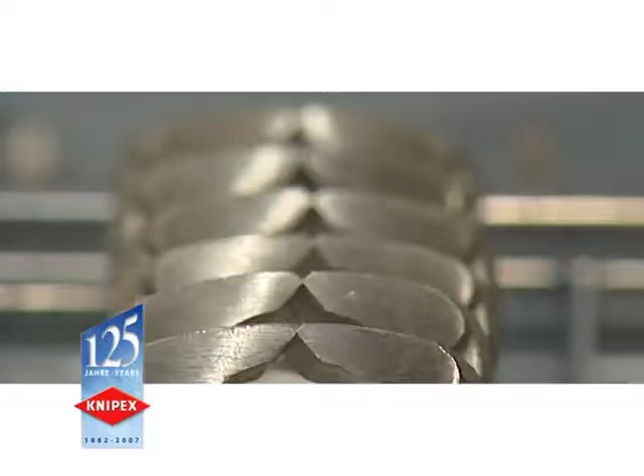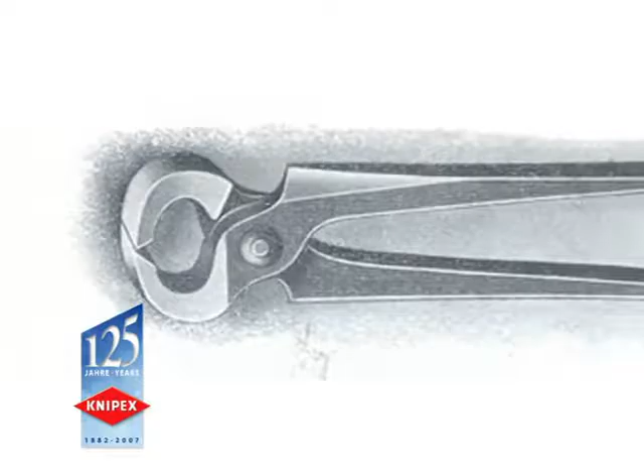It all starts in 1882 at Wuppertal Cronenberg. Carl Gustav Putsch sets up a small forge in which he, an experienced craftsman, and 2 apprentices manufacture pincers for carpenters and farriers. In the beginning, the small enterprise produces 60 pliers per day, all handmade.

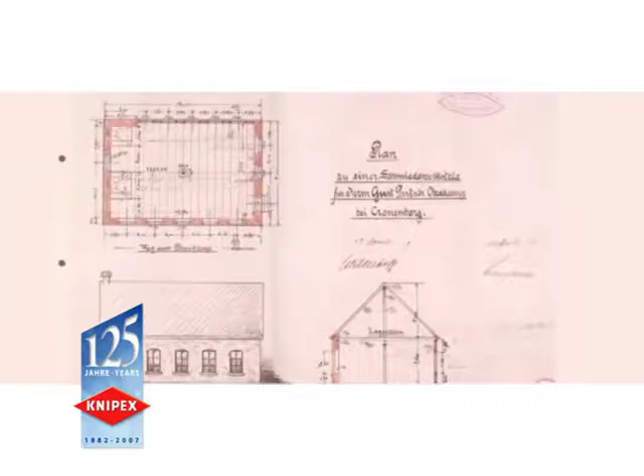At that time, there are more than 100 producers of pliers in the Bergisches Land region, the center of German tool manufacturing. Carl Gustav Putsch and his son Carl, who took over the company in 1922, are one of the successful manufacturers. They invest and expand. The first forging hammers and modern grinding machines are purchased. The material and finish of the pliers are continuously improved.

By 1927, 27 employees are producing 1,000 pliers a day. The small workshop has grown into a factory. The pliers are mainly sold through exporters and wholesalers.

Carl Putsch recognizes how important it is to give his excellent products a proper name. First, he uses the symbol CGP for Carl Gustav Putsch. Then, in 1942, he gets the brand name Knipex registered.

After the difficult years during the war, the company resumes work without having suffered any great damage. The product range is gradually expanded. Key products such as combination pliers, diagonal cutters, and water pump pliers are added to the Knipex product line.

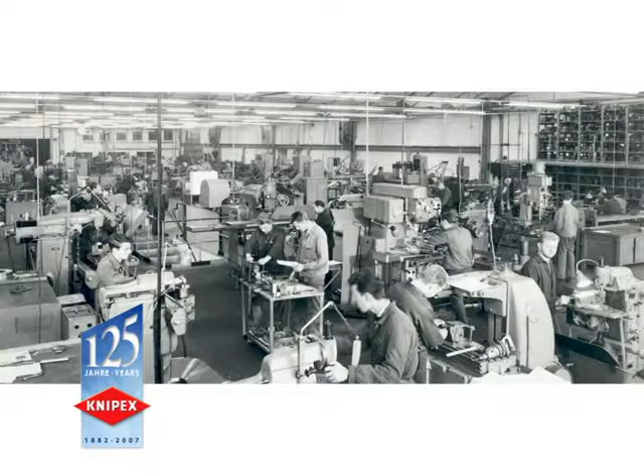In 1957, Carl Putsch Jr. takes over the management of the company from his father, who died at an early age. Knipex then has 250 employees. As a graduate engineer, he vigorously uses modern technologies to improve production and make it more cost-efficient. He is well aware of the importance of a good price-quality ratio.

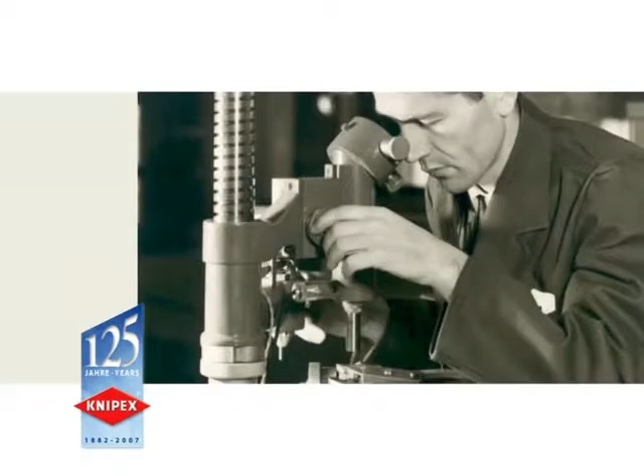Product innovations are also becoming more and more important. The newly designed pliers are of superior quality and set new standards in the industry. Carl Putsch's wife Ilse merits a large share of the success. She is largely active in sales and enjoys great respect in the industry.

A large number of countries are now supplied directly, and the Knipex network of representatives is growing. Knipex first becomes the leading manufacturer of pliers in Germany and then in Europe.

1987. The company then employs a workforce of 500, and Ralf Putsch joins the company. Ralf then assumes sole responsibility for the company in 1996. The up-and-coming generation continues to build on the solid foundations that built Knipex.

The distribution system is further extended, and Knipex marketing is reinforced. The first sales offices are founded and staff engaged abroad. Several manufacturers join the Knipex group. With their help, Knipex strengthens its position in certain product and market segments.

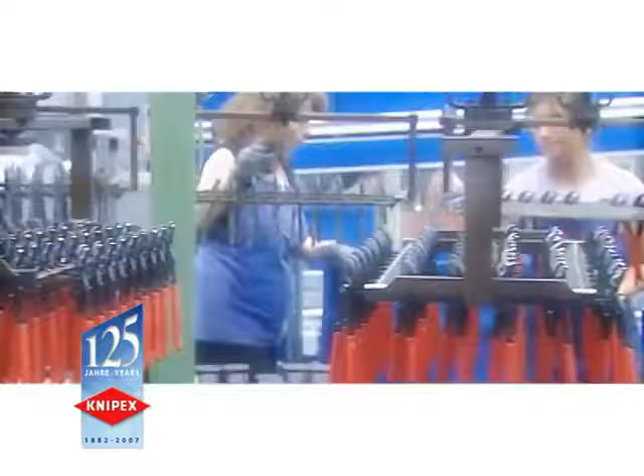Today, Knipex is the world's leading brand of pliers. More than 800 employees at Cronenberg produce over 45,000 pliers a day. To offer the best tool for every application, the product range now consists of over 1,000 pliers.

The continuous improvement of the range requires creative minds. How can hand force be reduced when cutting and gripping? How can work be done faster? How can the load and life cycle of pliers be raised? With what material and design? How do we improve ergonomics and safety? Again and again, our fresh ideas create a competitive advantage.

Modern software and systems engineering turn our ideas to the stage needed for production.

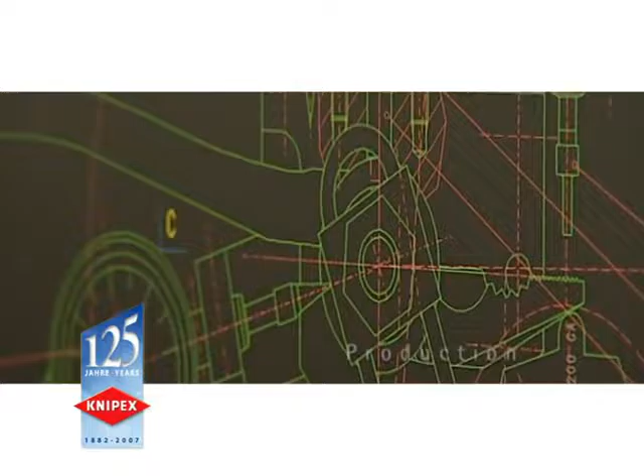We place high demands on our production. It is important that we directly control all conditions and processes. The high-quality steel is produced to our own specifications. The forging dies are milled internally on the basis of design data.

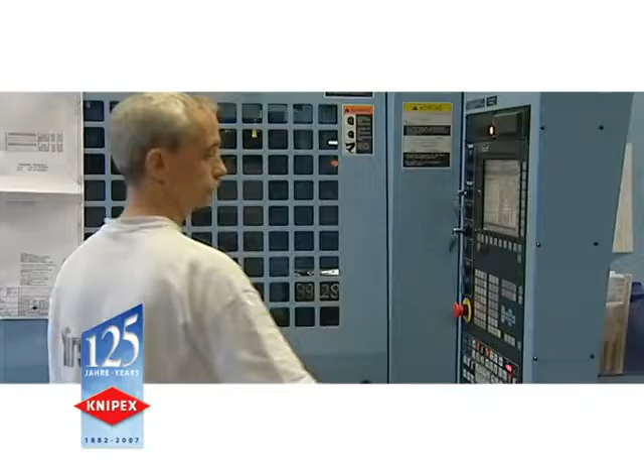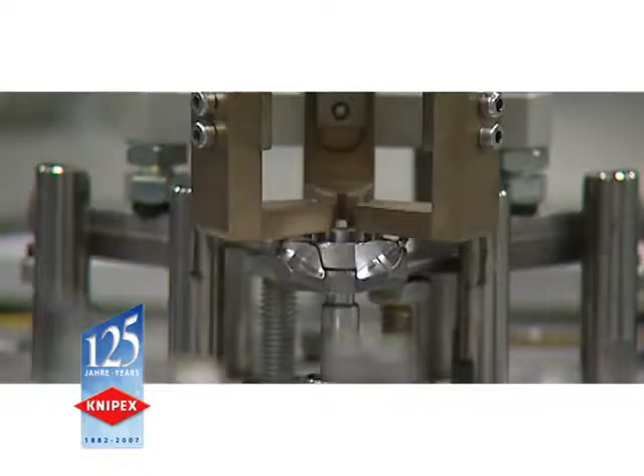The foundation for quality is laid during forging, just as it was 125 years ago. Modern production machines carry out the subsequent machining and assembly operations. We influence material properties by means of modern controlled heat treatment and thus achieve the best relationship between tool hardness and toughness.

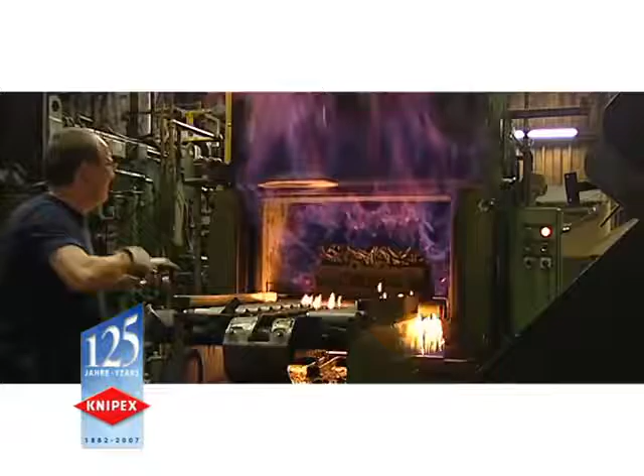The efficient production of pliers meeting the highest demands requires both modern technology and an experienced, well-trained workforce. These create precision and reliability. We accept nothing less.

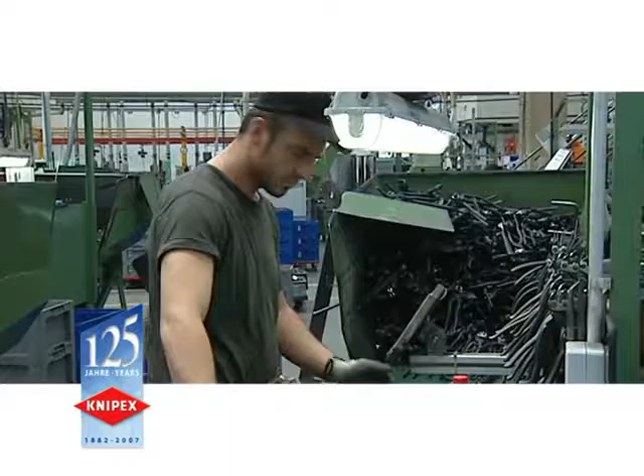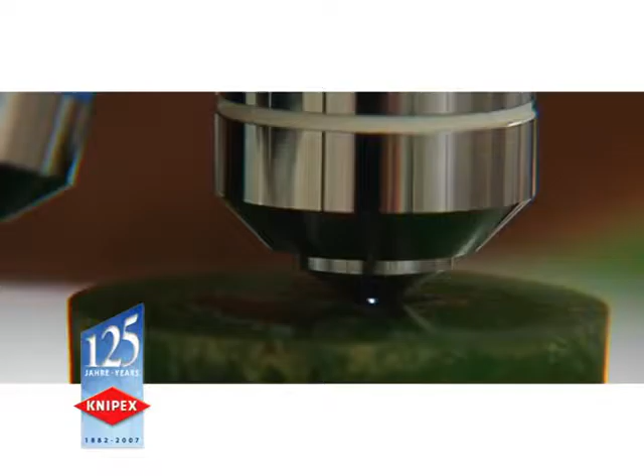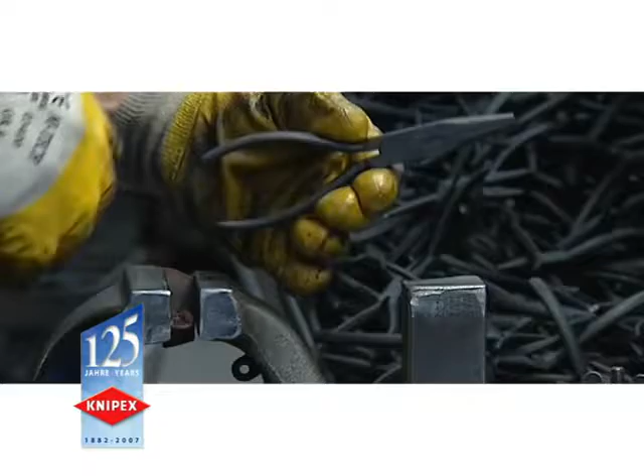100% reliability. This is what our customers expect. For this reason, each pair of pliers is checked as to faultless operation before leaving our factory.

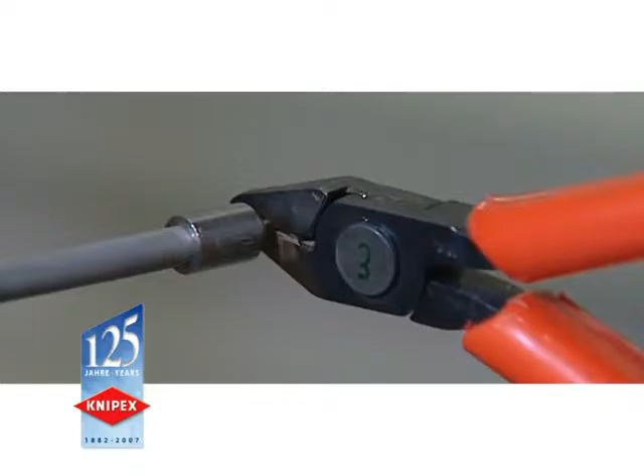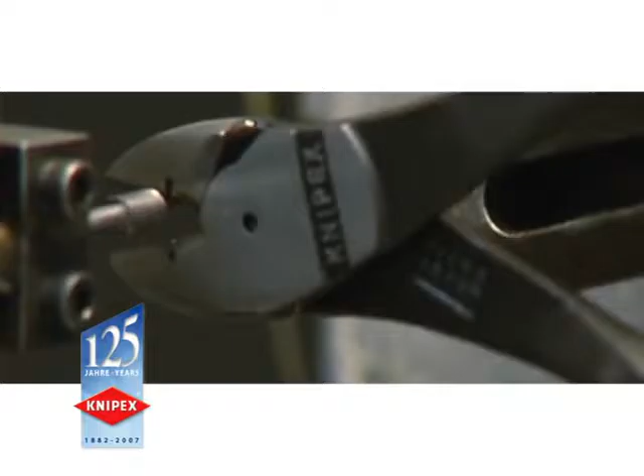We test new models and materials very extensively in our laboratory. Only those that passed the rigorous Knipex test procedures are released for manufacturing. Our endurance test shows just how great our lead is over our competitors.

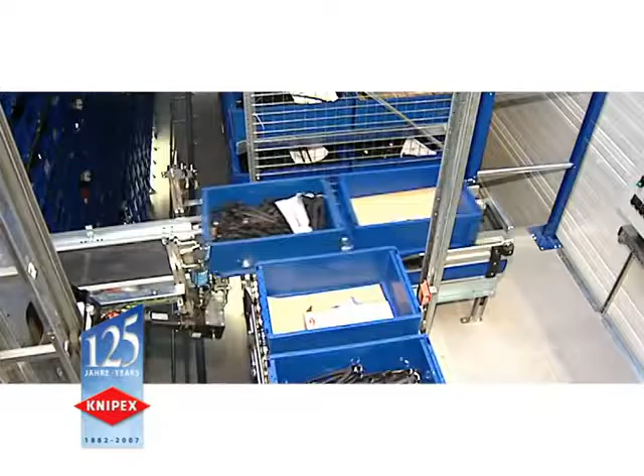Tens of thousands of pliers a day require a well-tuned logistics system, particularly in view of the high number of variations. Ultra-modern material flow techniques make sure that each pair of pliers reaches the right place in the warehouse or shipping department.

From here, the pliers are sent to all continents. We are present in 100 countries of the world thanks to our importers, representatives and branches. Although each market is different, there is always a path ahead. The key to success lies in close, effective cooperation with our partners. Our export share today is 65%.

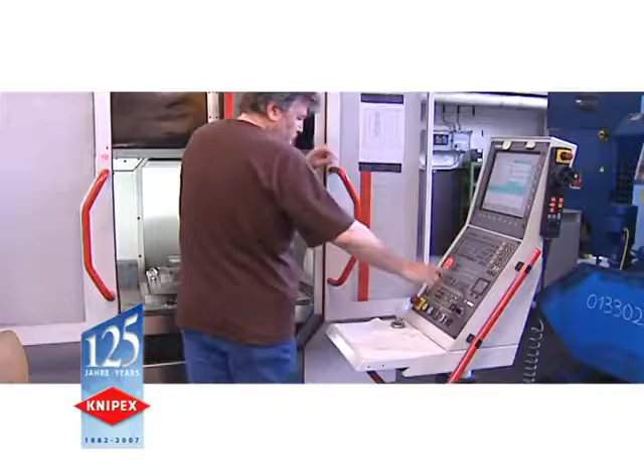We fully realize that our workforce represents our most important asset. Our employees have the knowledge and ability without which we would be unable to maintain our competitive edge. Only by above-average performances in all sectors and at all levels can we be successful in the future. The special commitment of our staff and short decision-making paths are the typical advantages of a family-owned company.

Values are important to us. We do not wish for success at all costs, and not at the expense of the environment.

The demands placed on our work and services are steadily increasing. That is why we are not only investing in machinery and buildings, but also especially in apprenticeship and ongoing training. We need both to sustain continuous modernization.

We believe that companies should be good citizens. That is why we get involved in many ways, and particularly in the social and cultural fields. We support many schools, clubs, and other initiatives in our town.

Our annual benefit concert for parts of the world in need has already become an important tradition. We are proud of the many employees who support us in our involvement.

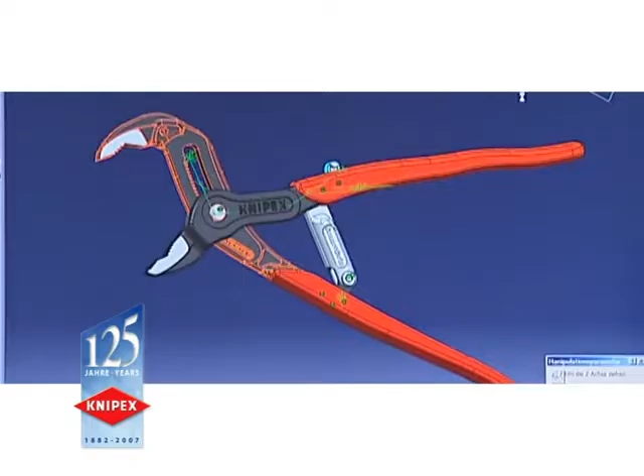Quality is decisive. We place the highest demands on our products and all our activities. Good is not good enough. We work with new ideas for continuous improvements.

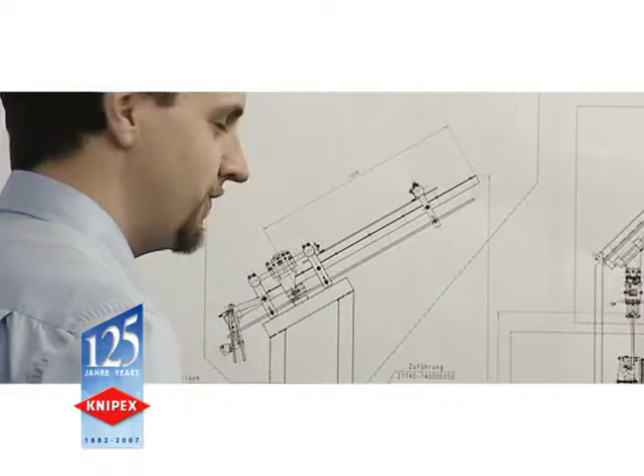Values count. We aim for a fair and good relationship with our workforce, partners, and environment. This is the basis on which we wish to grow, embark on new paths, and make use of our favorable chances, together with you as our valued partners.